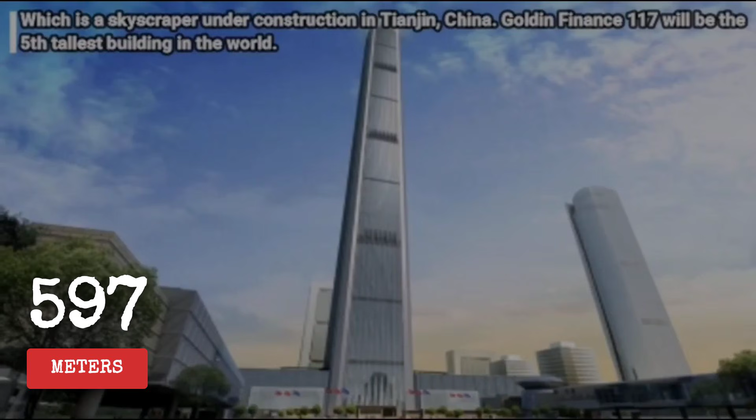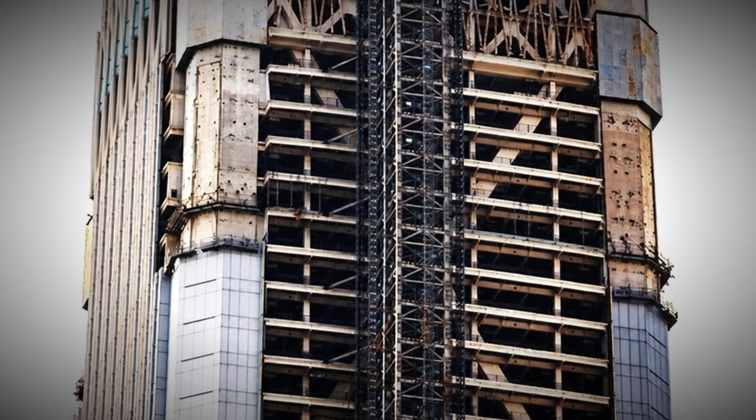In 2015, China finished building a 597-meter skyscraper in Tianjin. Nobody moved in. For 10 years, the tower stood empty. No cladding, no tenants, no lighting, just a steel and concrete shell, exposed to a northern Chinese coastal climate with freezing winters and humid summers.

In April 2025, China restarted construction. In March 2026, workers installed the diamond-shaped crown on top. The question nobody asked in any of that coverage: what did 10 years of exposure do to the steel and concrete inside?

Goldin Finance 117 broke ground in 2008 in the Xiqing district of Tianjin, a port city of 14 million people an hour south of Beijing. The ambition was explicit: the tallest building in northern China.

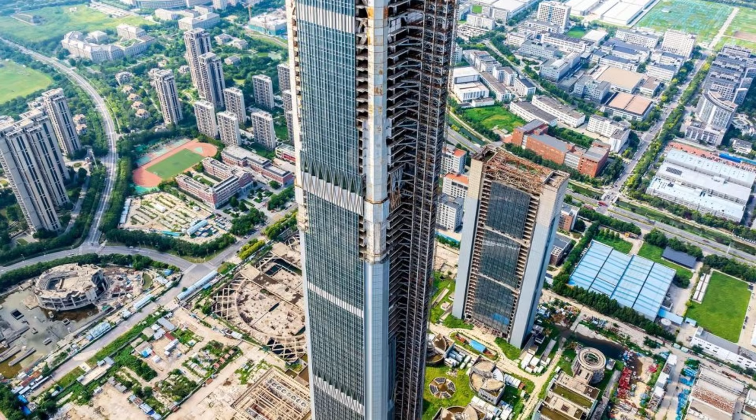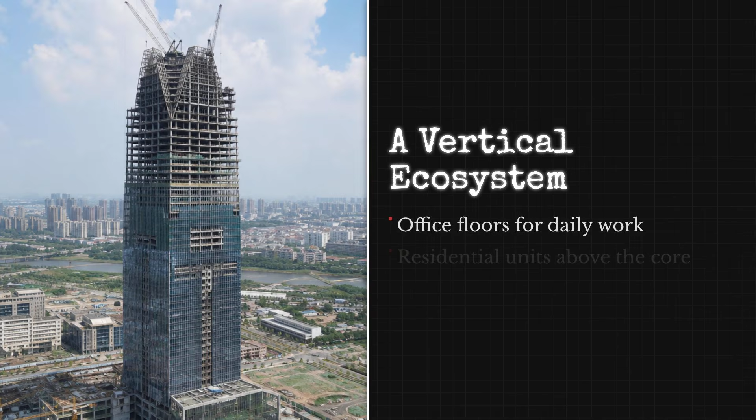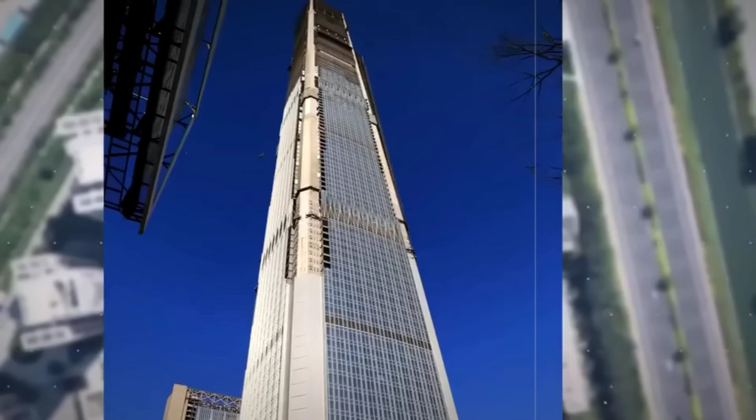597 meters, 128 floors, a luxury 5-star hotel in the upper sections, a swimming pool inside the diamond-shaped glass atrium at the crown, office space, residential units, and commercial floors stacked below. The structural system used mega columns, massive reinforced concrete columns running the full height of the building, specifically engineered to resist the strong winds and occasional seismic activity of the Bohai Bay coastal region.

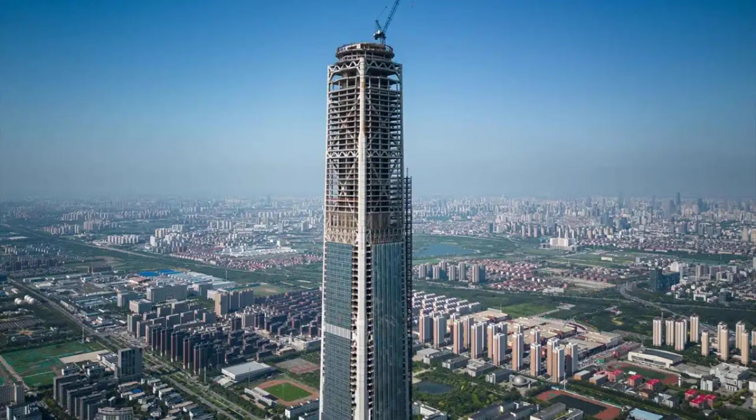Construction moved quickly. By 2012, the basement levels were complete. By 2013, the tower had passed 200 meters. By September 2015, it topped out at its full height. Then it stopped. The developer, Goldin Properties Holdings, ran into financial difficulties following China's stock market crash in mid-2015.

The crash wiped trillions of yuan from equity markets. Property developers who had borrowed heavily found their collateral shrinking faster than their debt. Goldin was one of them.

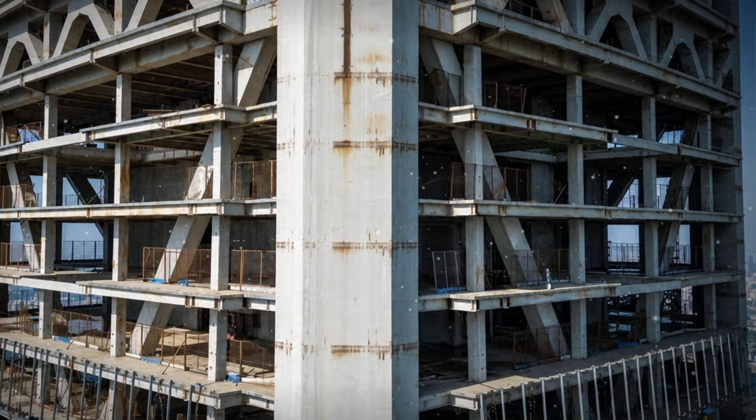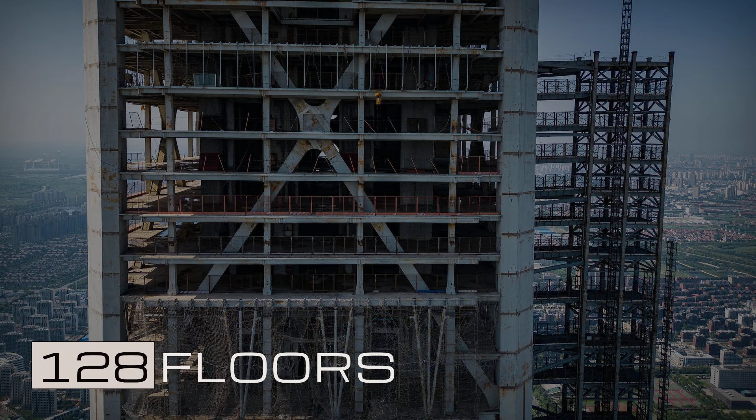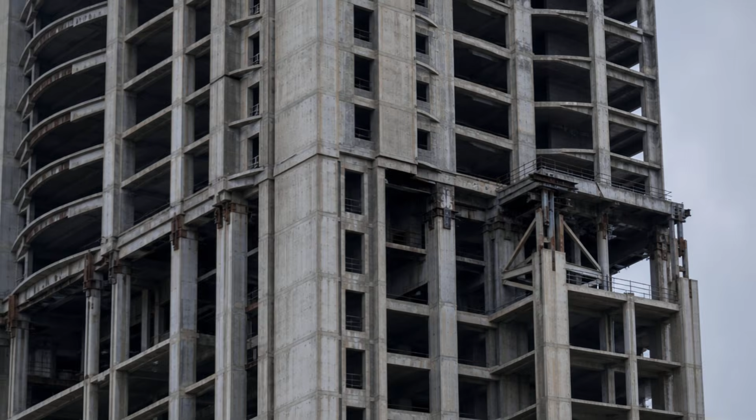The interior fit-out work never started. The glass cladding was never installed. The 128 floors of shell space remained exactly that: empty shell. For 10 years, Goldin Finance 117 became what one publication called the world's tallest ghost skyscraper. The Guinness World Records certified it as the world's tallest unoccupied building. The exposed steel structure and incomplete concrete surfaces stood in Tianjin's coastal climate for a decade.

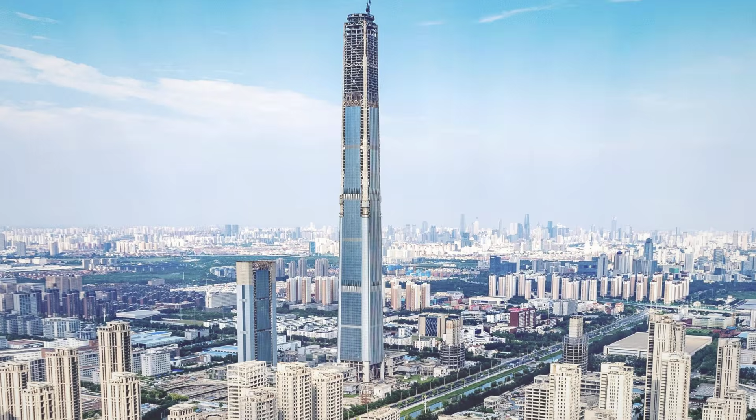Therefore, when the Chinese government issued a permit worth $78 million to resume construction in April 2025, the first question was not about the new tenants or the completion timeline. It was about what 10 years had done to the building that was already there.

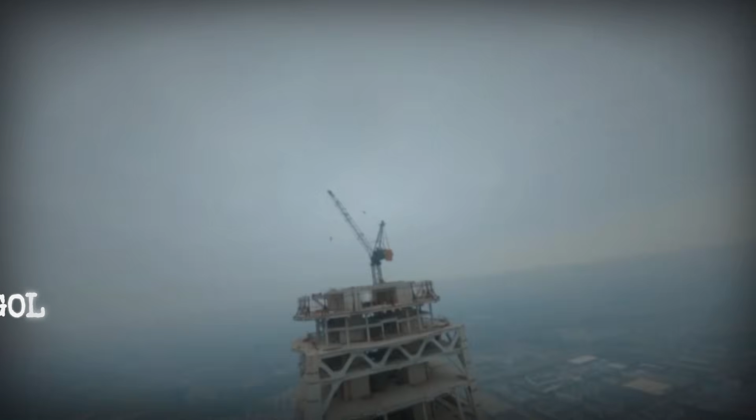We have covered this mechanism before, in the Jeddah Tower, in the Burj Khalifa, in the Palm Jumeirah Tunnel. But Goldin Finance 117 presents a specific version of the exposure problem that is different from all of those cases.

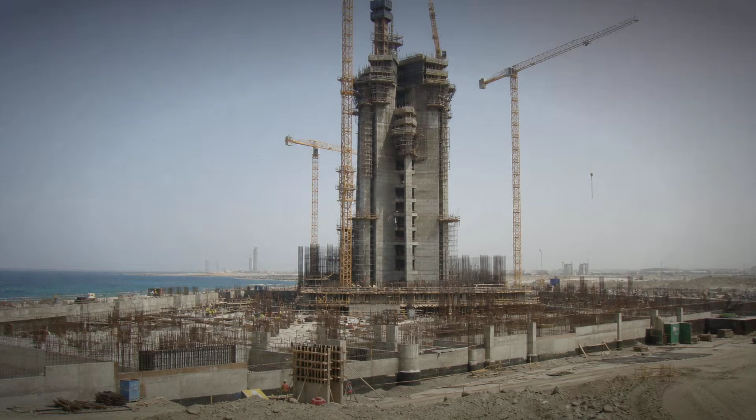The Jeddah Tower spent 5 years exposed with no cladding on its lower concrete sections. That exposure happened in a Red Sea coastal environment: high salt, high humidity, high temperature. Goldin Finance 117 spent 10 years exposed with no cladding on its entire exterior.

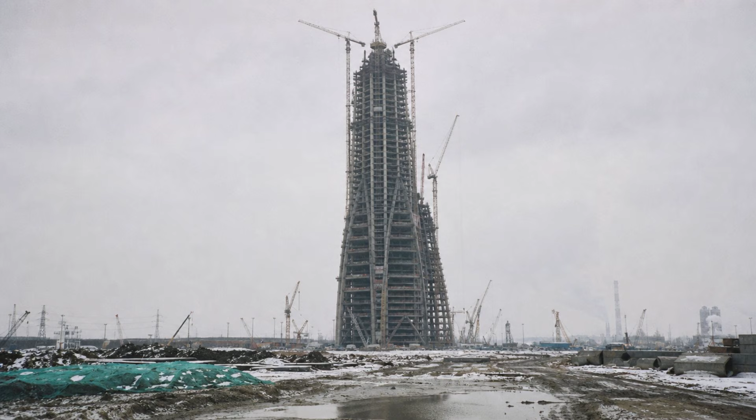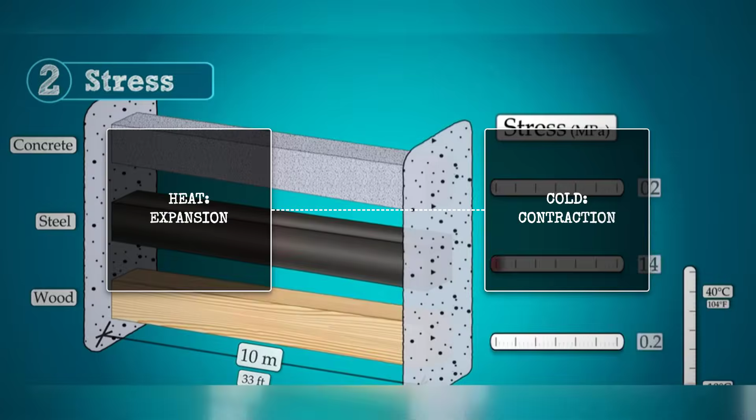Tianjin sits on the Bohai Bay. Winter temperatures drop below minus 10 degrees Celsius. Summer temperatures exceed 35 degrees. The thermal cycling, the expansion and contraction of concrete and steel through those extreme seasonal swings, is itself a degradation mechanism that operates independently of moisture and salt.

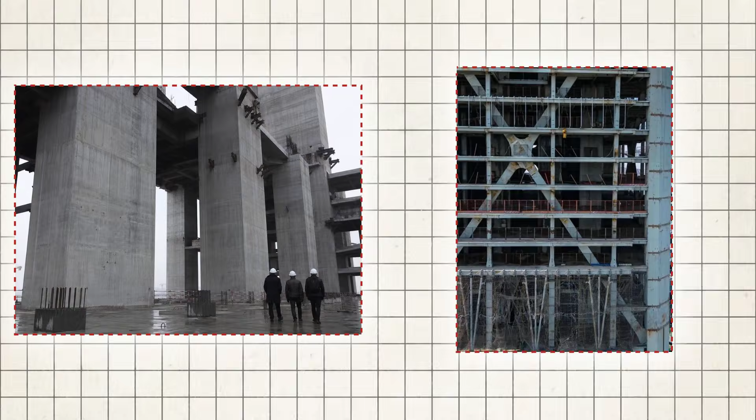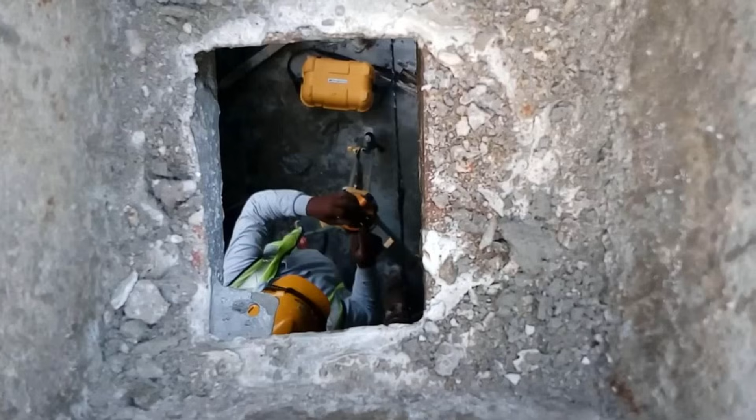Here is what thermal cycling does to a tall building's structural system over a decade. Concrete and steel expand when heated and contract when cooled. In a building with a completed envelope, those movements happen in a controlled environment. In a building with no envelope, exposed directly to the atmosphere, those movements are larger and less controlled. Over 10 years of Tianjin winters and summers, the accumulated effect of that cycling on the connection between the concrete core and the steel perimeter is a question that requires specific engineering assessment.

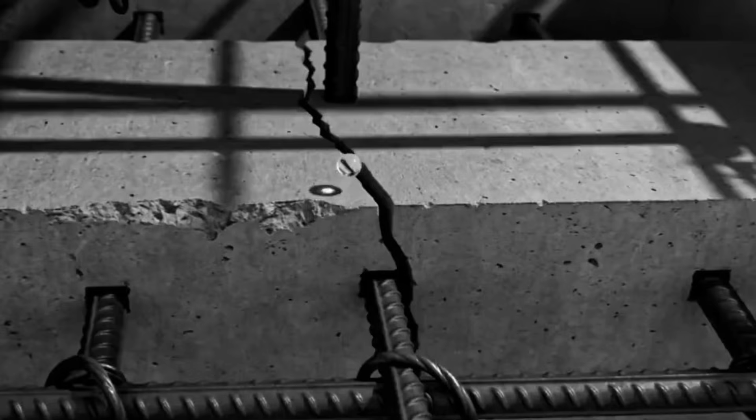Then there is the moisture issue. Without cladding, rainwater penetrates the building's shell directly. Water that reaches the concrete surface begins the chloride penetration process. Water that reaches steel connections directly accelerates corrosion.

The Chinese government's $78 million resumption permit is not an inspection report. It is a construction authorization. The specific condition of the structural steel and concrete after a decade of exposure has not been published. Stop for a moment, because here is the detail that makes this different from every other abandoned skyscraper story.

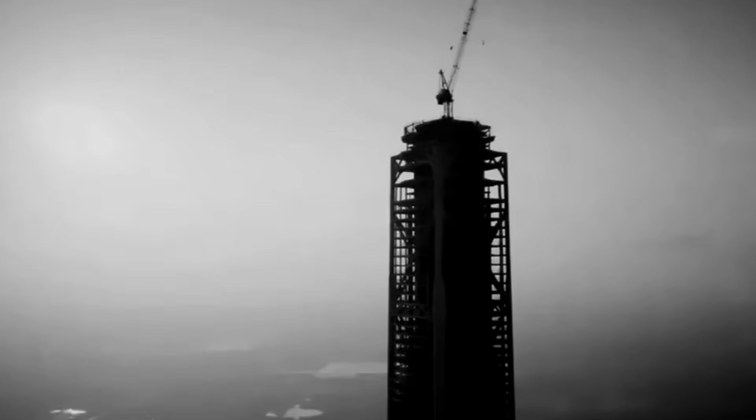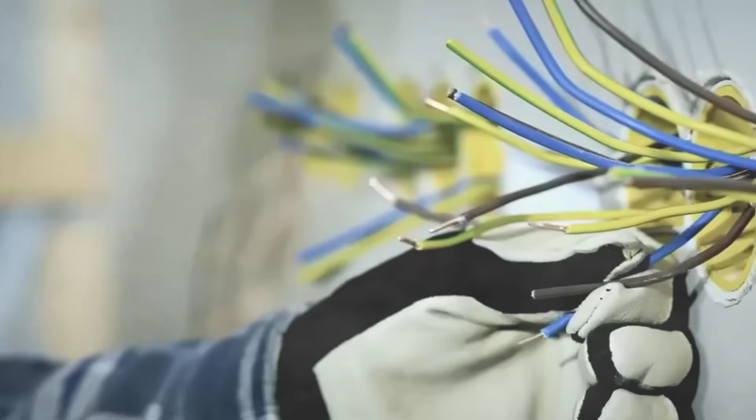This one is being finished, and people are already signing leases. In March 2026, Chinese state media reported that leasing for Goldin Finance 117 had been largely completed. 17 companies have committed to space, 7 of them state-owned enterprises, 10 private firms.

A state-owned enterprise moving into a government-rescued building in a government-led resumption project is not a market signal, it is a policy decision. The Chinese government is using Goldin Finance 117 as a demonstration project, proof that China's property sector can be stabilized.

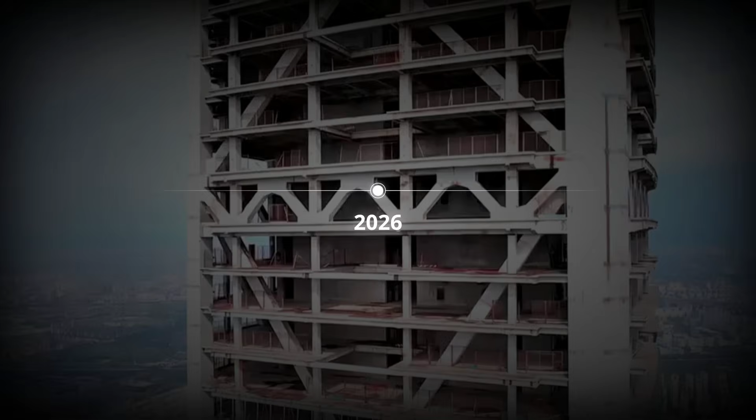The diamond-shaped crown was installed in March 2026. Completion is targeted for 2027, 18 years after construction began. But here is the question that the state media coverage does not address.

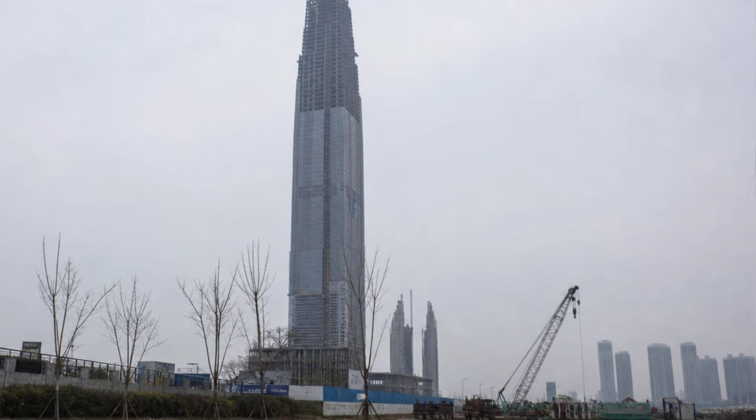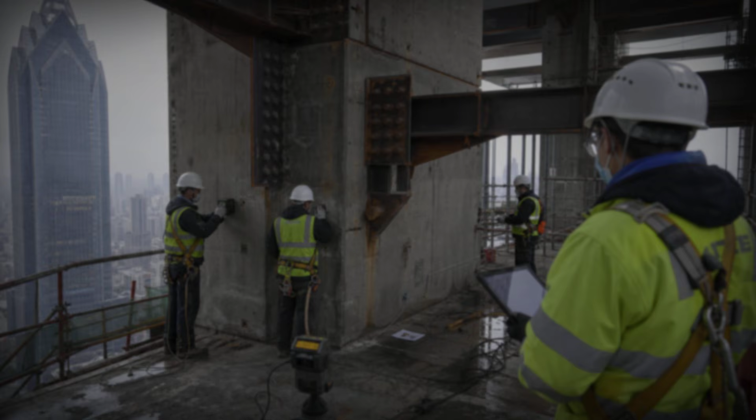The 7 state-owned enterprises signing leases are committing their employees to work in a structure that spent 10 years as the world's tallest unoccupied building, exposed to the elements without cladding in a coastal climate with extreme thermal cycling. Those employees do not know what the post-exposure structural assessment found. BGI Engineering Consultants, which is managing the resumption, conducted that evaluation. Its findings have not been published.

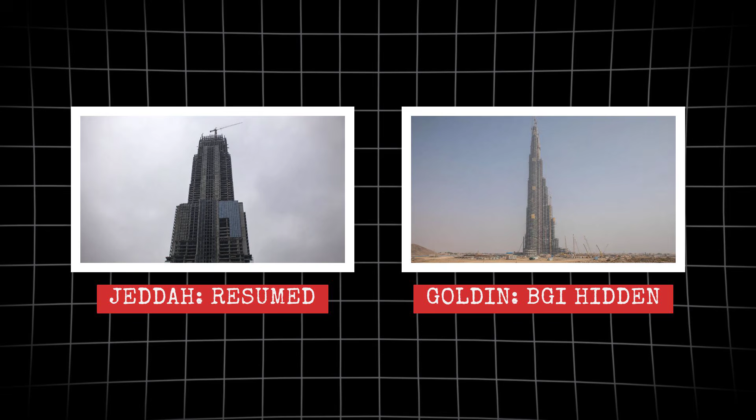The same pattern we identified at the Jeddah Tower, construction resuming after extended exposure, inspection data not released, is repeating here at a building that spent twice as long abandoned, in a climate that imposes different but equally significant degradation mechanisms.

There is a detail about Goldin Finance 117 that connects it directly to the broader pattern of China's super tall ambition. Goldin Finance 117 and other previously failed skyscraper projects in China were directly responsible for the government banning construction of buildings over 500 meters. The tower that triggered the ban is now being finished by the government that imposed it.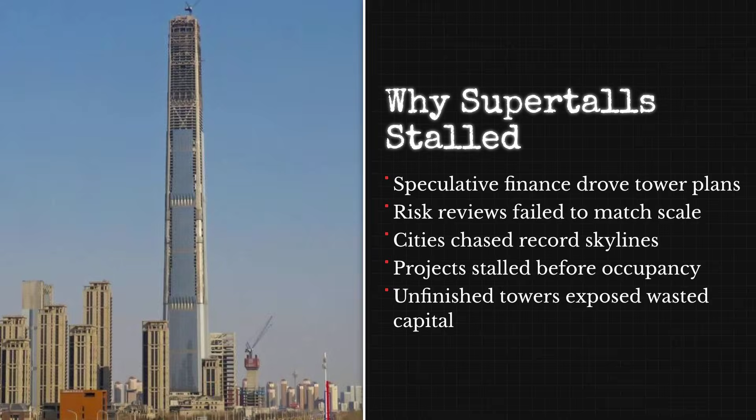In 2020 and 2021, China's National Development and Reform Commission banned new buildings above 500 meters, specifically because projects like Goldin Finance 117 had demonstrated that the combination of speculative financing, inadequate risk assessment, and local government competition to build record-breaking towers was producing buildings that couldn't be completed, couldn't be occupied, and sat as physical evidence of misallocated capital.

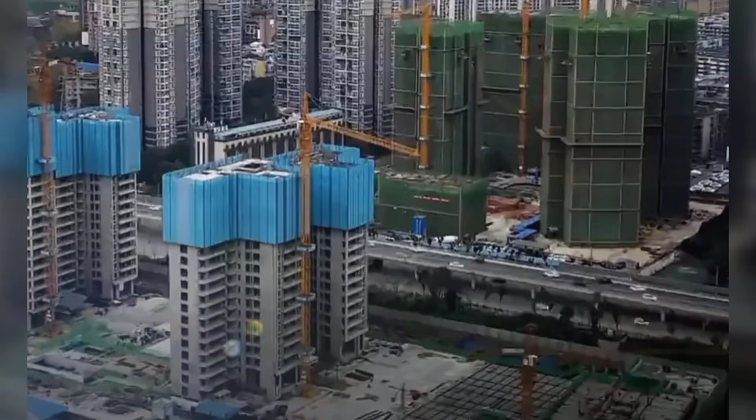The ban was the lesson learned from this building. The building is now being completed as a symbol of recovery. When it opens in 2027, Goldin Finance 117 will be one of China's last super talls for the foreseeable future.

The buildings that would have followed it cannot be built. The category it belongs to has been prohibited. The tallest ghost skyscraper in the world is becoming the last super tall in China.

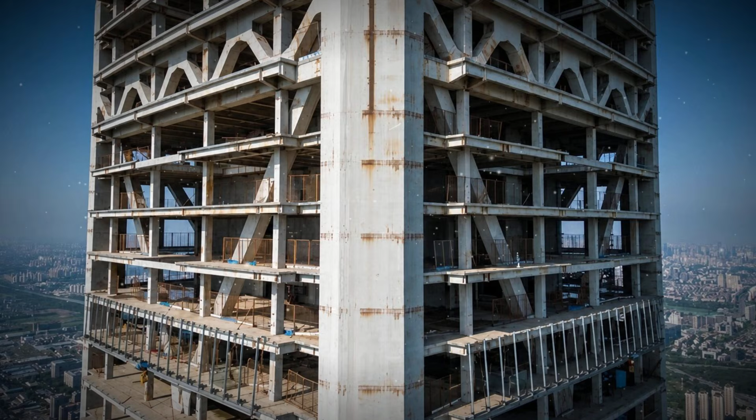And the question of what 10 years in the open did to its interior is the question that nobody in that story has answered. If Goldin Finance 117 completes on schedule in 2027, it will have been under construction in various states for 18 years.

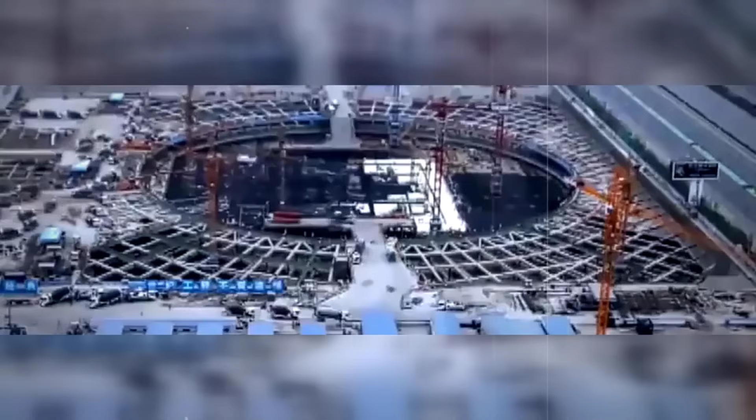The foundation system was designed in 2008. The mega columns were poured between 2009 and 2015. The core walls reached 597 meters in September 2015. The building then stood exposed and unoccupied until April 2025.

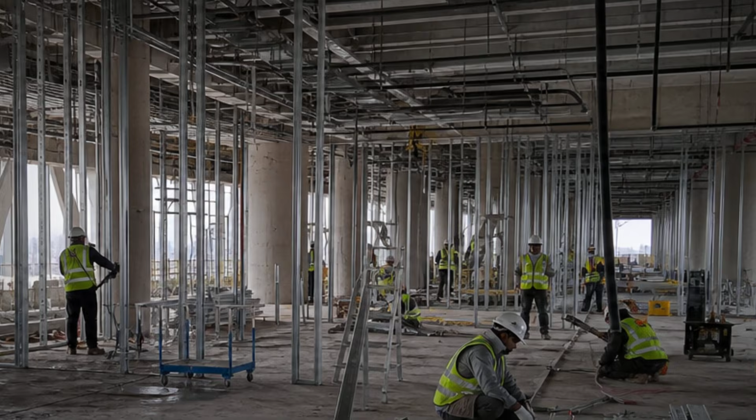Now, interior fit-out is underway. Mechanical and electrical systems are being installed. The diamond crown is in place, the leases are signed.

Every one of those employees will be working inside a structural system whose post-exposure condition, the specific measurements that tell you whether 10 years of Tianjin winters and summers changed anything about the relationship between the steel and the concrete, has not been made public.

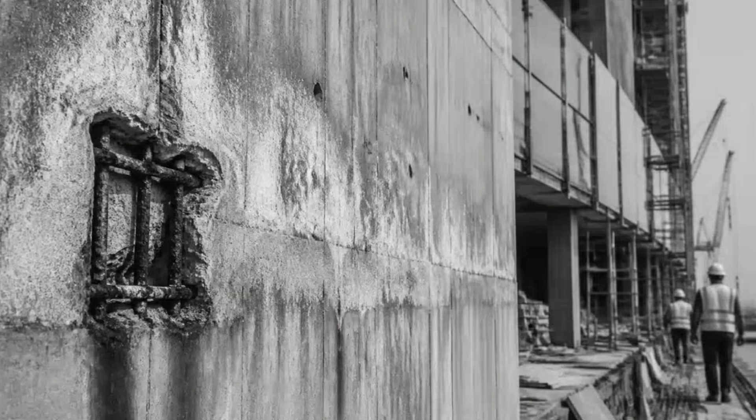We have seen this before. The Jeddah Tower resumed construction after 5 years of Red Sea exposure. The inspection data was not released. The cladding went on. The concrete underneath is now permanently sealed behind glass.

Goldin Finance 117 resumed construction after 10 years of Tianjin exposure. The inspection data was not released. The interior fit-out is underway. The employees signing leases do not have access to the engineering assessment that justified proceeding.

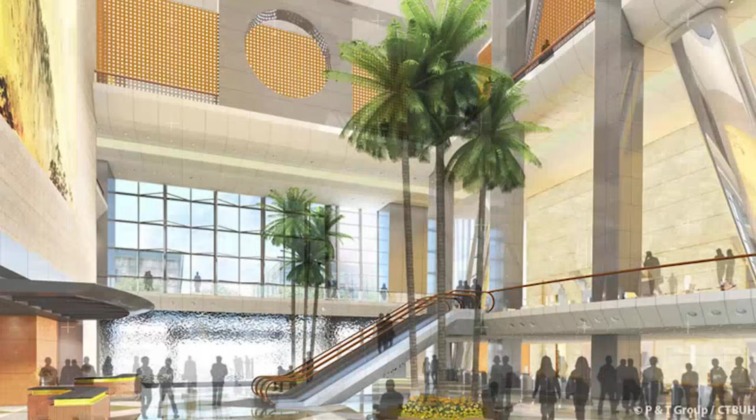Both buildings will likely be completed. Both will likely open. Both will likely function for years without visible problems. The question we ask on this channel is not whether visible problems will emerge tomorrow. It is whether the people inside these buildings have access to the information that would allow them to make an informed decision about being there.

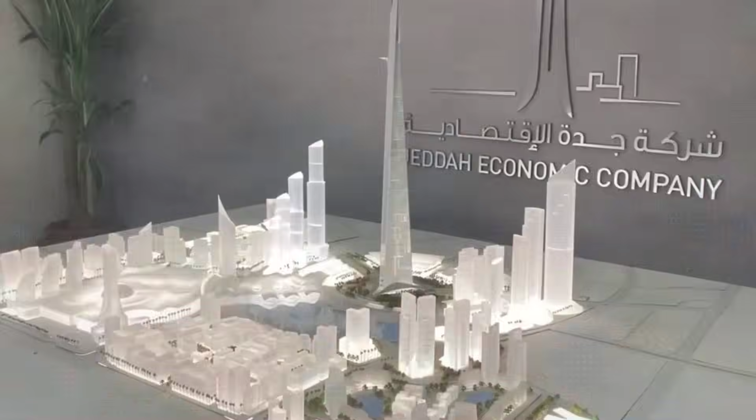At Jeddah Tower, that information has not been shared. At Goldin Finance 117, the building that triggered China's super tall ban and is now being finished by the government that imposed it, that information has not been shared either.

The crown is installed. The leases are signed. The inspection report is somewhere in a filing cabinet in Tianjin. Drop it below: would you sign a lease in this building?